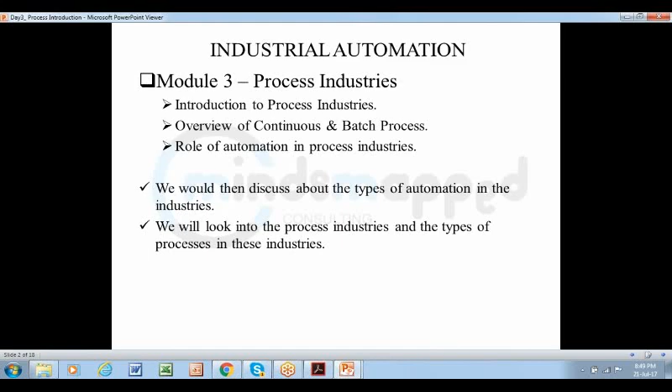So now we have a look at the process industry: introduction to the process industry, overview of continuous and batch processes, and role of automation in process industry. And then we'll discuss the types of automation in industry and the types of process in this industry. Now, process is defined as a series of actions or steps taken in order to achieve a particular end. What exactly is a process? Any process is basically the series of actions which are taken in order to achieve a particular end.

Like, we simply talk about a machine shop. You're taking the raw material in the form of a rod, let's say, and you're putting it on a turning center, and then it is programmed to perform certain operations: turning, boring, maybe threading. At the end of it, you get a threaded shaft with a hole, internal or external threads, maybe slots. So that is a simple process.

Similarly, the process can be very complex also. So as we understand, processes are defined as a series of actions or steps taken in order to achieve a particular end. The process, as used in terms of process control and process industry, refers to the methods of changing and refining raw materials to create end products.

So, as I said, you take a raw material and then you perform certain actions and steps to achieve the final product, whatever you want to make. So, the raw materials which either pass through or remain in a liquid, gaseous, slurry, or mix of solid and liquid state during the process are transferred, measured, mixed, heated or cooled, filtered, stored, or handled in some other way to produce the end product. So, we are talking about a process like, let's say, the steel industry.

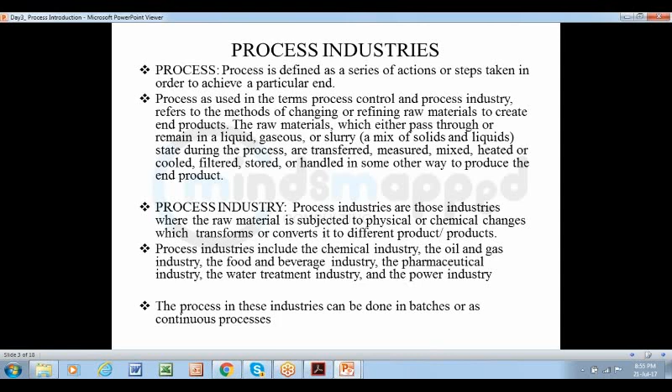Batch process is the manufacturing process where the final product required is produced stage by stage at different workstations. So it is not one continuous flow process. You have different stages, different batches are processed. You take one batch, it starts from one end. After completion of one stage, those products will be transferred to the next, then the next operation would be performed, and then that batch would be taken to the next station like that.

So in batch process, identical products are produced by means of assembly lines. The automobile industry is a good example of this. The raw material used to create these products is the same from the first product to the next product. Pharmaceutical is also a good example. Food and beverages, paint industry. So these are the examples where we have batches.

The continuous process is the manufacturing process in which everything from the receipt of raw material to processing of the final product happens continuously. There is no break in between. You don't have to collect the finished product from one step and transfer it to the next. So that is the main difference between batch and continuous process. In continuous process, the raw material is either bulky or fluid in large quantity that flows continuously and undergoes chemical reactions or is subjected to heat treatment.

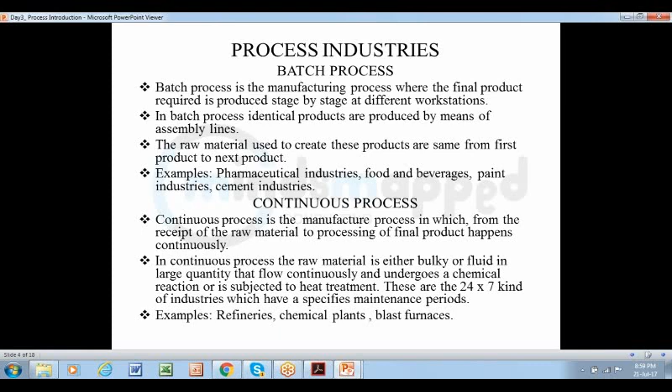In the food processing industry which makes sauce, the process from receipt of ingredients to making the sauce happens continuously, and this is a continuous process. The filling of sauce into bottles of different sizes happens in a batch process. Bottles of a specific size and predefined number will be filled at a time. Once this batch is completed, the next size bottle is taken for filling. So this is a combination of continuous and batch.

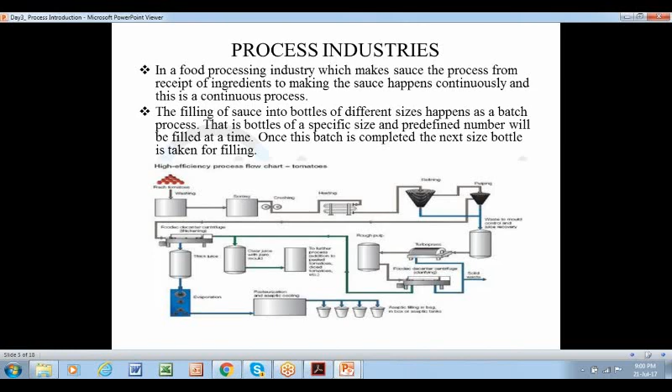You can say that at one end we are feeding the raw material in the form of tomatoes and it's getting processed continuously, and then the product is stored in silos or hoppers, and then at the bottling end you have a batch kind of thing where different sizes of bottles come in different batches. So it's a combination of the two. It's just an example. It's a continuous-cum-batch process, I would say.

Then comparing the batch and continuous processes, there are various factors. The cost of factory and equipment in the continuous process is very high because we have to install equipment which can handle that volume, a large amount of raw materials, and which can work in a rugged environment because you are going to do a lot of chemical and physical processing, with high temperatures involved. They also have to be extremely reliable to keep working for weeks and months together. Whereas the cost of equipment is very high in the continuous industry, in batch it is low.

Then the rate of production: in a continuous process it is high because we are installing equipment which can handle a huge amount of raw material, and the processes will be efficient only when you are handling large volumes, because it will not be economical to run that process at low volumes. So the volumes have to be high; only then will you get the economical advantage. So the rate of production is high, and in the case of batch, it is low compared to the continuous process.

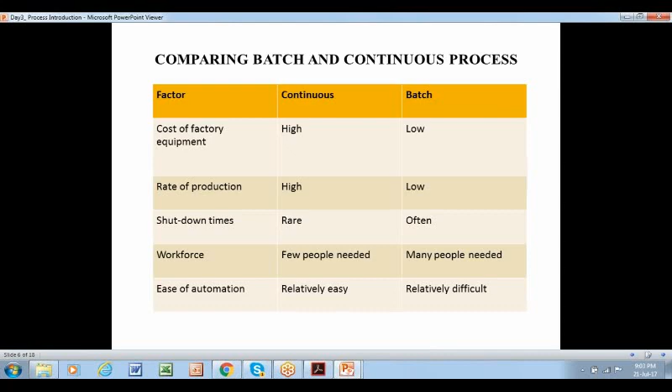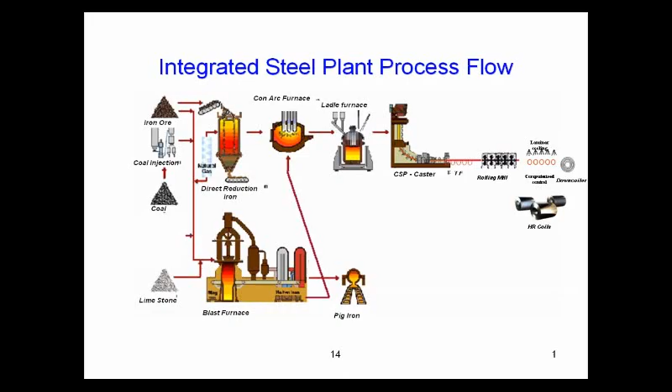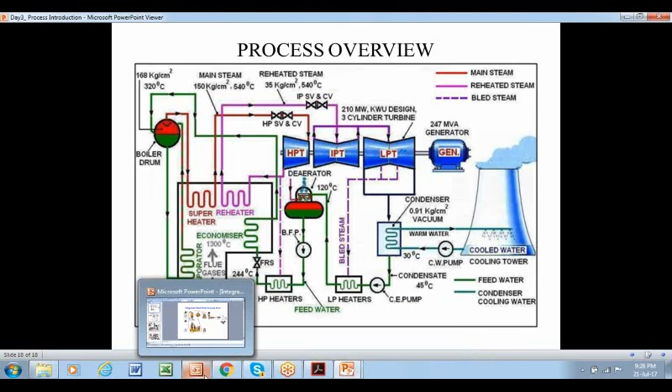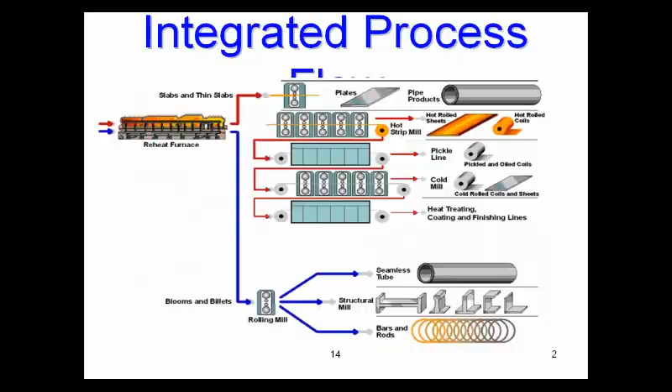See, a typical blast furnace like this would involve thousands of instruments at every stage, because there are so many parameters involved. There are so many different sections of the process, and you have to have each section monitored and controlled to have an efficient process, and control the quality of the product which is coming out at the end of the process. Because you must realize that at the end of the process, if you get a bad product, you don't have any means to control it or any means to rectify it.

So it has to be done right the first time. That is the most critical part. That it has to be done right. Otherwise, it will be a waste at the end of the day. So throughout the process, at every step, it has to be controlled. It has to be monitored and controlled properly to get the desired end result. And a typical blast furnace would be having thousands of instruments.

And if you look at the automation part, I would say that a huge automation system is required to control this kind of furnace, which will be having thousands of inputs and outputs to be measuring various process parameters, monitoring various sensors, and based on the feedback, it will be giving commands to again thousands of final control elements like valves or maybe the feeding systems and all to correct the process and bring it to the desired level.

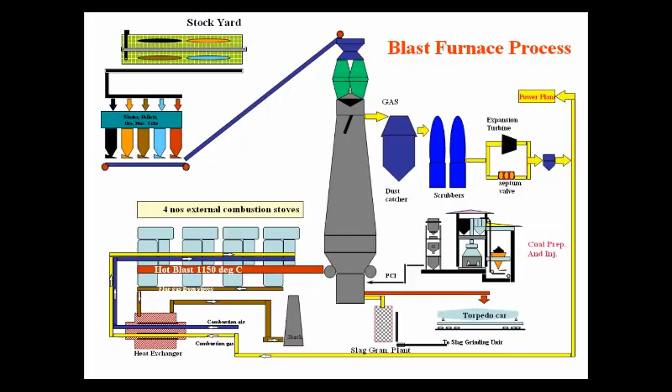Similarly, for a lime producing plant, we'll be having again hundreds of instruments at every step to control each step, to control each sequence. It has to be weighed, it has to be measured, and the quantity is to be added. Then it has to be in a particular ratio. It has to be in a particular condition with the temperature. Then only you'll be able to process it right and get the final product.

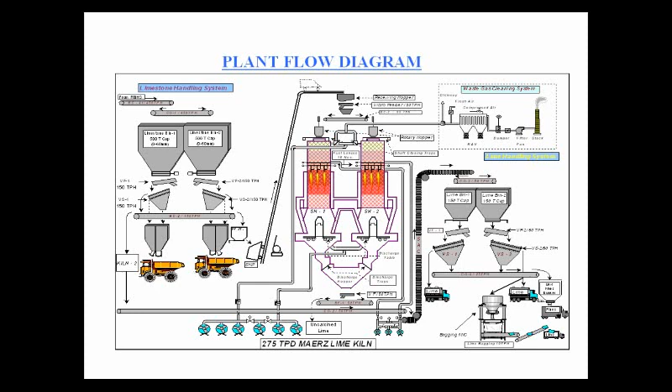So if you don't control it, then you won't get the desired result. If you don't measure it, you won't be able to control it. So you have to see it in that way, that whatever you want to control, it has to be measured accurately. Then only you are able to control it accurately.

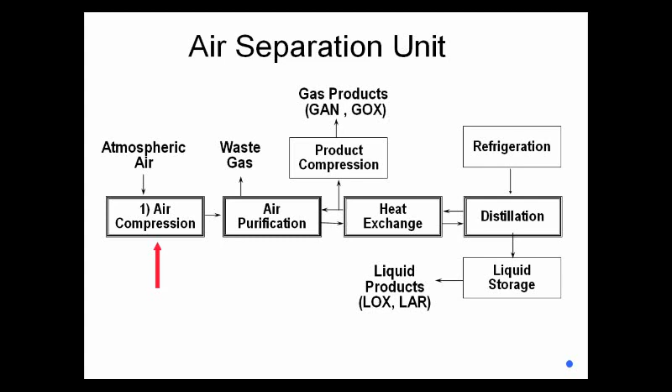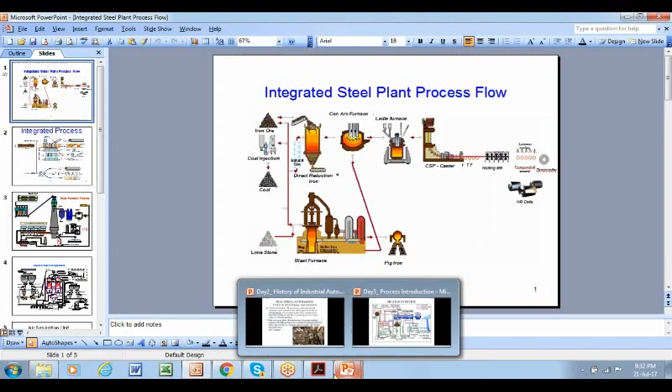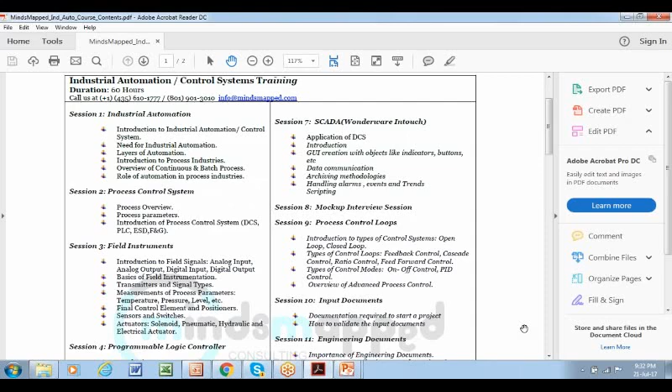So with this, can we close today's session? Any queries? I can answer that. So our next session would be introduction to process control systems, and then we go to the field instrument part, and then we'll go to the PLC. So I hope you are having the curriculum with you.